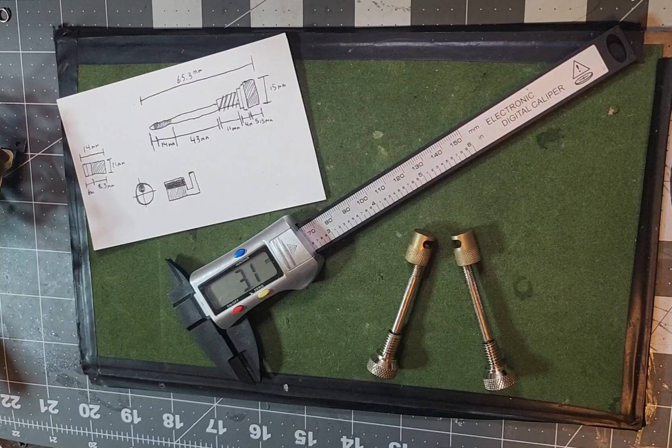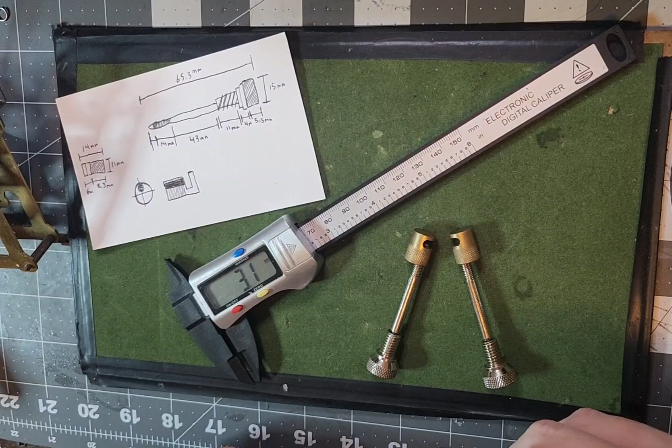As a machinist, a lot of times when you come across a tool that you may need for a clock repair, such as this cuckoo clock movement, it's sometimes cheaper and more economical to make the tool than to buy it. If you're on a tight schedule and the customer needs the clock back in a week, ordering the tool could take a week just to ship, putting you in a bind. Also, there's the price of the tool.

What we have here is what I call clock legs, or movement legs. These are some that I made personally on the lathe, and I'm going to show you exactly what we did.

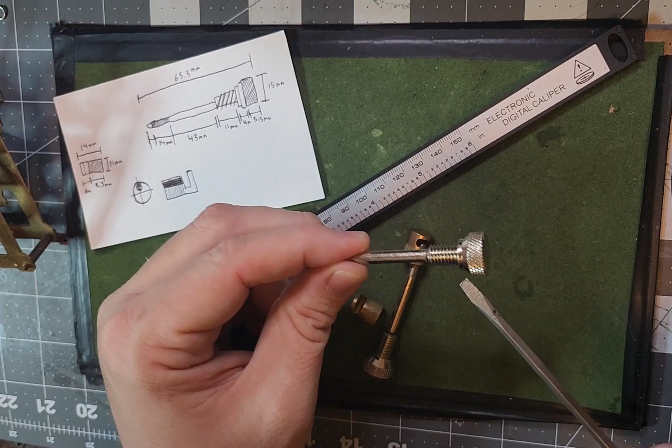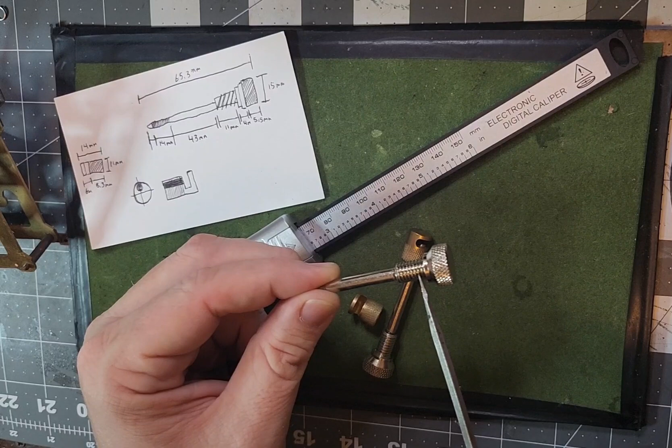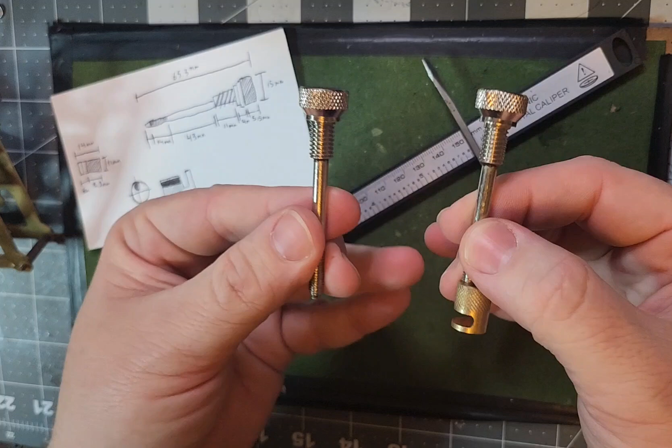This is going to be used if I'm hanging it on a wall. I have a fixture that fits onto this, and a nut will screw onto it to hold both pieces, so it fits onto the wall like so. I'll show you more about that in a moment.

Then I turned the shaft down and put a tapered piece here at the end. The shaft itself is 43 millimeters, and from here to here is 14 millimeters. I threaded this piece using a die.

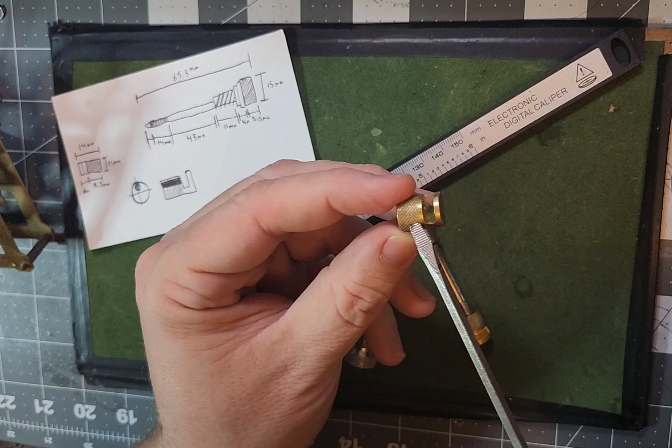As you can see on the back side, I drilled way off center. There's a reason for that. I drilled up at the 12 o'clock position, tapped it, and chamfered the hole. So this will actually thread onto here, like so. There's a reason that it's offset.

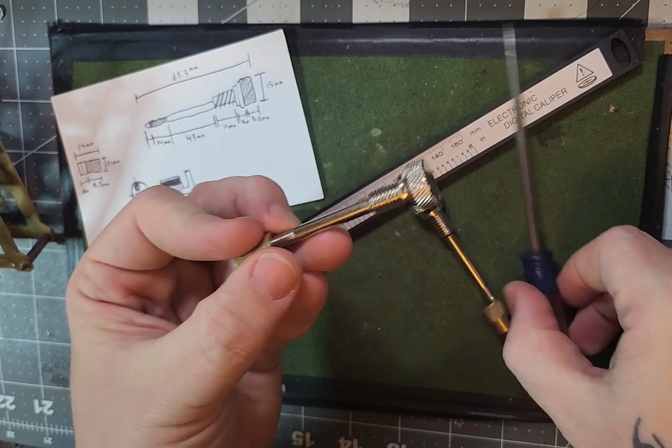I also put a heavy knurling on this end, because this is the part you're going to be putting a lot of pressure on. I also chrome plated it at the same time. So if you're working on this and need to work on the movement, this will fit perfectly in the movement out of the way, and you can tighten it down here.

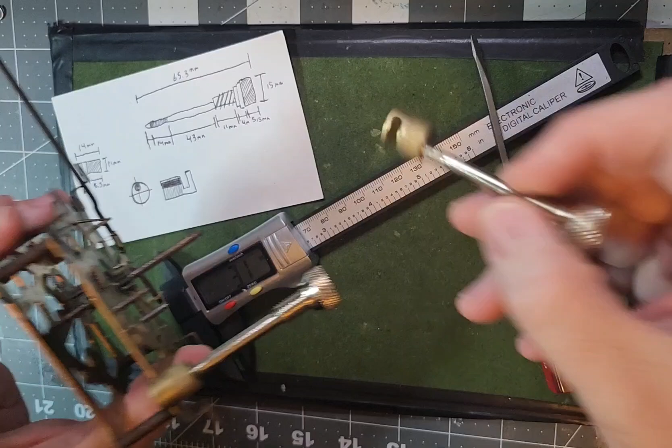And I made a duplicate one here, so we'll place it on the bottom side here and tighten it down.

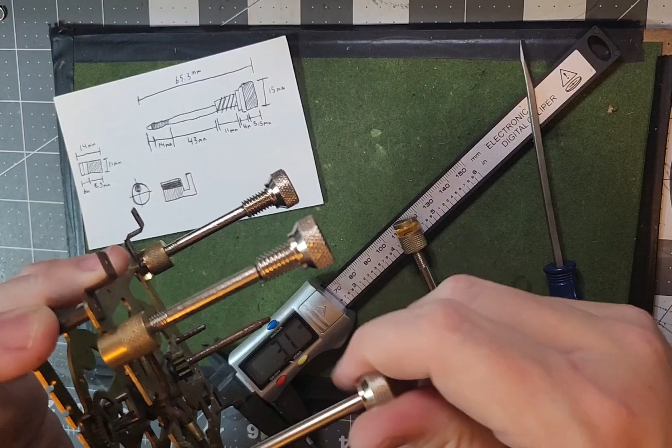Now I have another duplicate set, but these are a little different, and I'm going to show you those in just a moment. So we're going to place one here. They're all the same length, there's just a little bit of difference, and you'll see that in just a moment. And then one here.

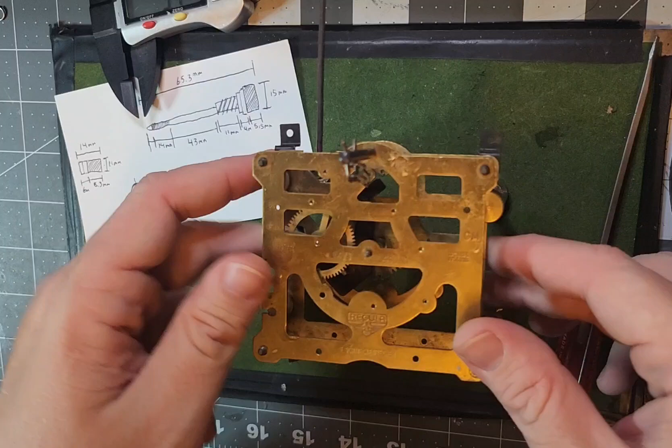These come in handy when you're working on a movement, because these become legs of the movement. Now you have the movement suspended off the workbench, so you can access the bottom to work on the pivots, work on the gears inside, rotate it any direction needed to manipulate the parts. It acts as a shelf, kind of, or a stabilizer.

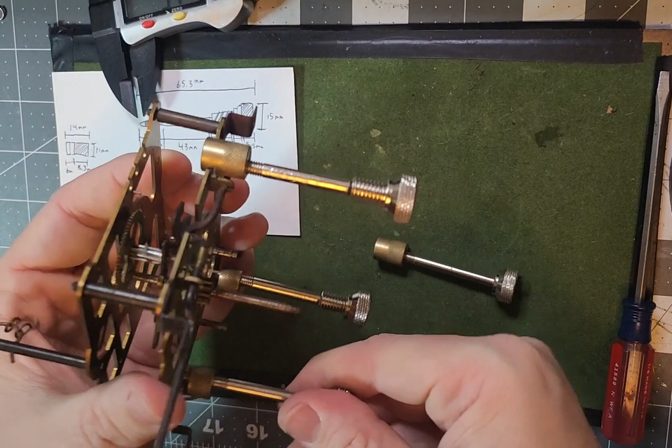Now what sets these two pieces apart is, instead of having this threaded piece, it's just the solid shaft. But it's the same length, everything's the same. It just does not have this extra threaded piece, because these are not going to be wall base mounts.

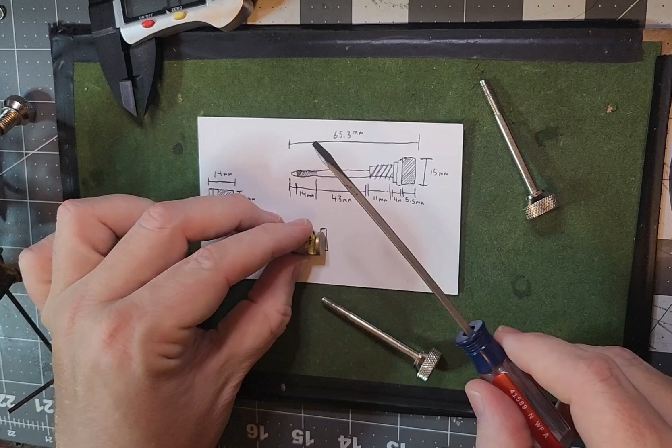Even the blueprints that I drew up personally match everything precisely, even the placement of the hole. As you can see, the black piece here - if we were to lay this over this piece here, this black piece indicates the hole that's drilled completely through into the other piece. So as we screw it on, you will see how the piece comes through and locks.

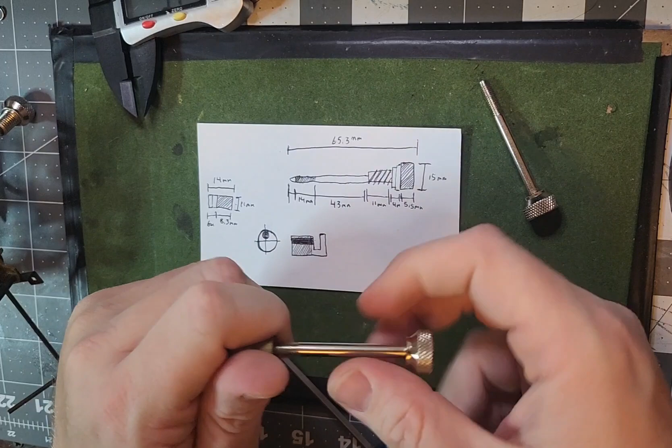Now you can buy this set from a clock maker such as Time Savers, Merritt's, or some of the other clock places. You can get them in a set of 4, just like this. They sell for about $30. But again, it takes about a week and a half to get them ordered and delivered.

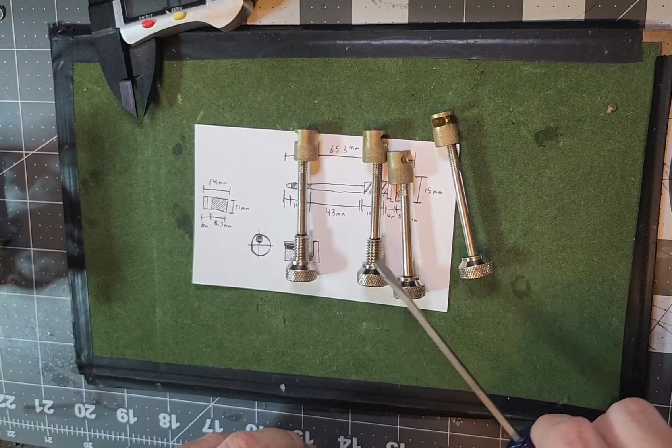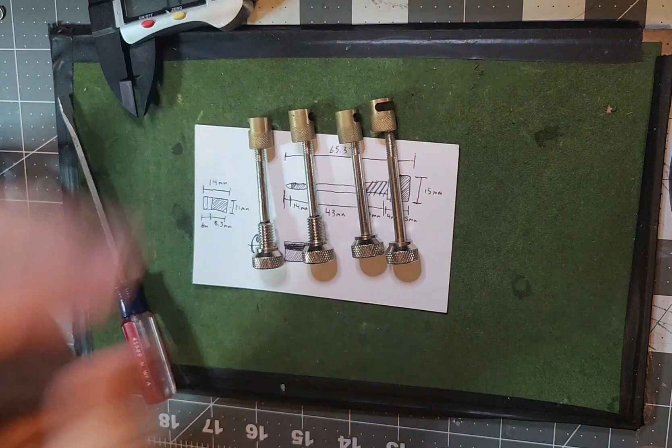So with all 4 pieces to custom make the arbors and the caps to fit, I have roughly $12.97 in all 4 pieces. Time-wise, each one took roughly an hour to make, so you're looking at 4 hours per set to make, which is a lot less than a week's time getting it in the mail.

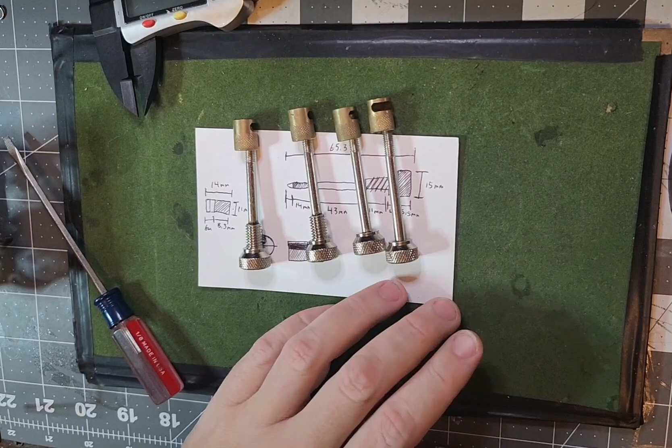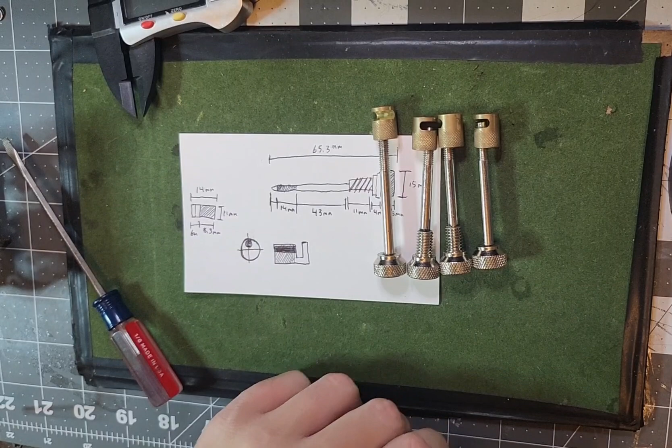So sometimes it pays to make your own parts if you have the ability, the lathe and machines to do it, and the knowledge, measurement tools, and dies that you need. But if not, it's probably cheaper to go ahead and buy them - that way you know it's professionally made. But if you are any type of clock maker working with tools on a daily basis - measurement tools, lathes, milling machines, grinders - this is a very simple project, and you can save a lot of money by making your very own tools.